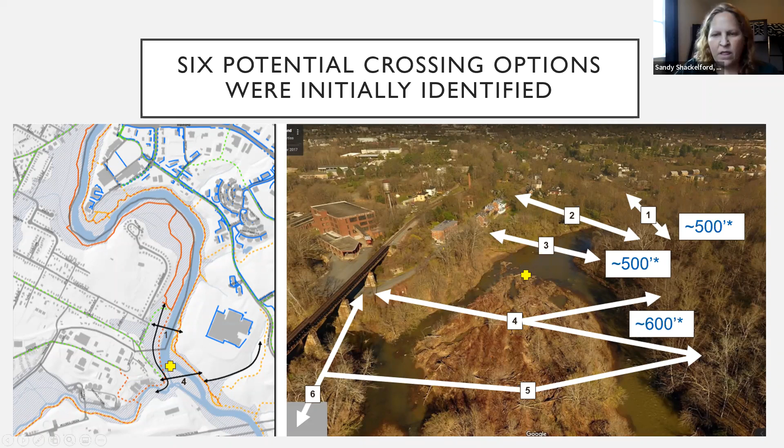Out of the original 6 options, 2 remained, shown on this diagram as options 1 and 4. The 2 alignments that remained are the ones you can see here on the diagram in red. I know it might not show up too strongly. The top alignment is what we'll refer to as the Chesapeake Street alignment.

It spans from the State Farm property on the east side of the river to the end of Chesapeake Street on the west side, landing basically at Riverview Park. The lower alignment is referred to as the East Market Street alignment.

It also spans from the State Farm property—this isn't privately owned property, it's owned by Albemarle County—and it lands on the west side of the river near the end of East Market Street.

This is actually private property owned by the Wool Factory development site, but it does have a public use easement.

Because this is a transportation project, both alignments are required to have logical termini that provide access to the existing transportation network. That means on the east side of the river, a shared use path, shown as this white dashed line, will be required to be constructed from the bridge landing to the transportation network. The termini, or connection point, for that was determined to be Peter Jefferson Parkway and State Farm Boulevard.

On the west side of the river, the bridge landing would tie into the transportation network either through a direct connection at Chesapeake Street or through the public use easement at East Market Street.

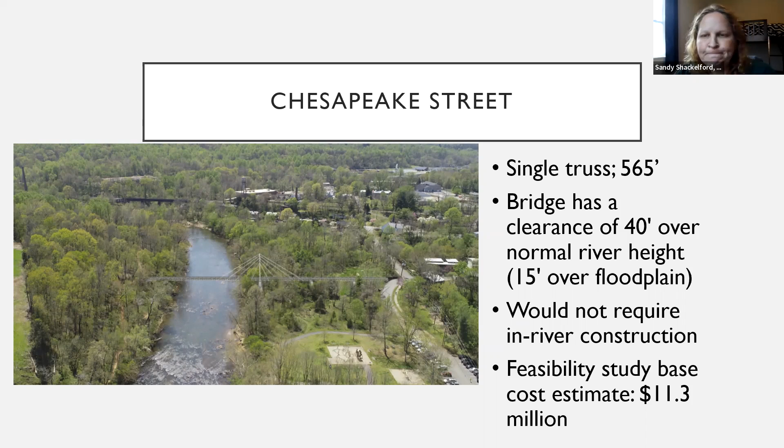Again, a different bridge design could be installed at this location, although the bridge design could also impact the cost estimate. The planning level cost estimate, although also likely to increase as the engineered plans are developed, is intended to provide an understanding of the cost differential between the two different bridge options.

In November of 2020, after this feasibility study was wrapped up, MPO staff facilitated a webinar that reviewed the feasibility study with the public and addressed many of the technical questions that had arisen as part of the feasibility study. The purpose of that webinar was to provide an opportunity for the public to ask questions about the feasibility study and share comments and thoughts, but the MPO did not have clear guidance on moving forward towards project implementation at that time. The feedback received from that webinar has informed the engagement process moving forward.

Any questions at this point before we move forward?

So I'm just going to talk about the engagement that we've been conducting to gather information that was used to basically inform the rest of the discussion that we're going to have today.

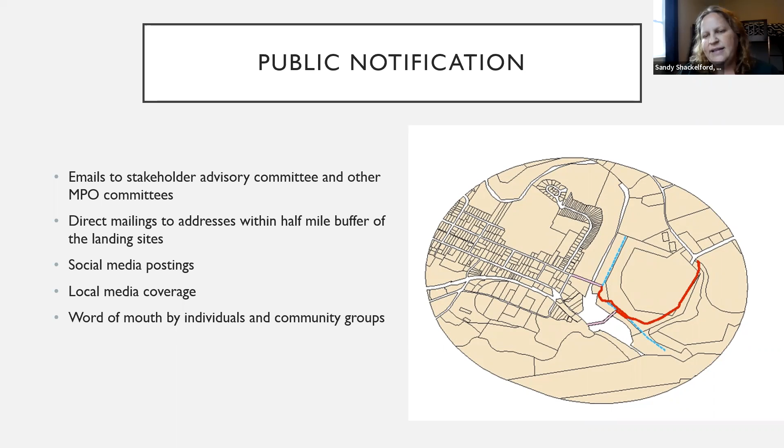We used a variety of methods to get the word out. We sent information to the MPO committees and stakeholder advisory committees to have them distribute the information through their networks. We also sent out a postcard mailing to all addresses within a half-mile buffer of any of the proposed bridge landings - you can see that on this diagram or map. We posted information on our social media platforms and provided information to local media and community organizations on request. All of these contacts help distribute the information and raise awareness.

So what did we talk about when we did all this engagement? This is a list of the factors that were part of the discussion. These factors were informed by the MPO's Citizens Transportation Advisory Committee, and then they were reviewed and refined based on feedback from the Stakeholder Advisory Committee.

So the first thing we can talk about this afternoon is how this bridge fits into the overall network connectivity for the area. There is a need overall for improved network connectivity, and everybody involved in this process knows that regardless of this bridge, there are still improvements that will need to be made to this network in the local area. But this bridge is not intended to solve all of the network connectivity concerns in the area near the proposed landing sites. It is intended to solve a very important network gap in the local area, which is getting across the river. The river currently acts as a barrier to movement.

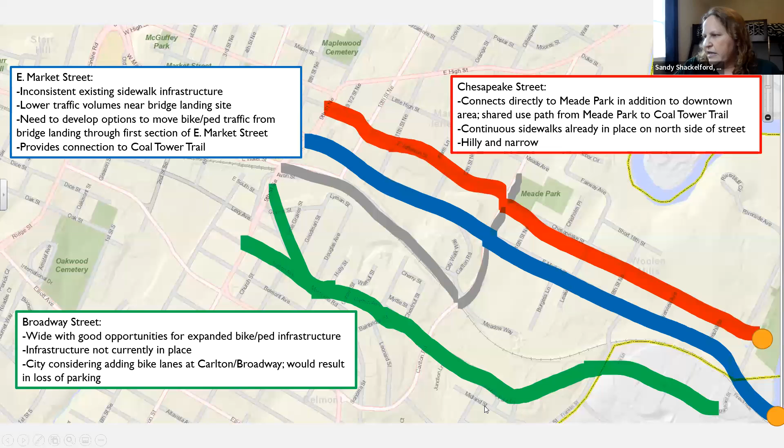There's also inconsistent sidewalk infrastructure along East Market Street going into downtown Charlottesville, but it also provides a connection to the Coal Tower Trail. The green line at the bottom shows the connection down Broadway Street. This would basically be facilitated by the connection at East Market Street through the public use easement that goes through the wool factory development site. However, it would involve traveling through the main parking area of the wool factory development, and there's no dedicated bicycle or pedestrian pathways through that development area. However, Broadway Street itself is wide, and there could be opportunities for future bicycle and pedestrian infrastructure to be constructed along Broadway Street. It's just not currently in existence.

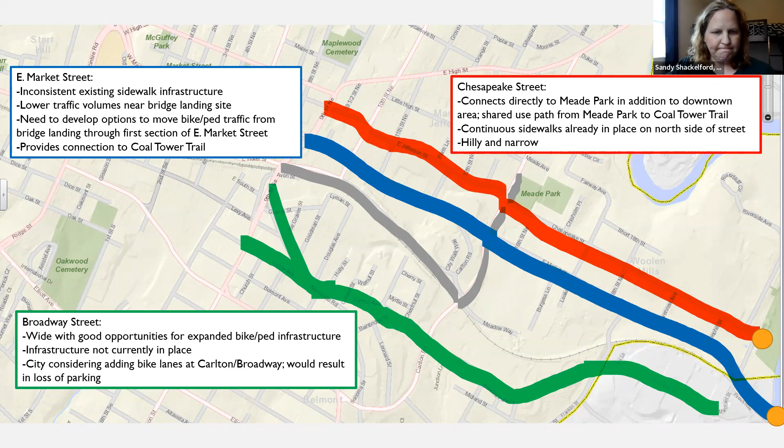The next thing we talked about was the trail connections. Also under consideration is how the bridge will facilitate connections between the two different trail systems. On the east side is the Old Mills Trail, and on the west side is the Rivanna Trail system.

Both alignments will provide a similar connection point to the Old Mills Trail on the east side of the river. The Chesapeake Street alignment would provide direct access to the Rivanna Trail at Riverview Park, up through here. Whereas the East Market Street alignment would provide a more direct access point to the Rivanna Trail system through the wool factory development site, right through here. Most of you are probably familiar that there's a footbridge at the wool factory development site that goes across Meadow Creek, so that would be the access point from East Market Street.

While either portion of the Rivanna Trail can be accessed from either of the bridge landing sites, there's a gap in the trail network of the Rivanna Trail between the sections at Riverview Park and Wool Factory that requires a short distance to be traveled on road.

As you heard in some of the comments, parking was a really big topic of discussion during the Stakeholder Advisory Committee meetings. This is due to an existing parking shortage at Riverview Park. This was a challenging conversation to navigate because it's outside the scope of this project to alleviate the existing parking demands, but understanding the concerns that there will continue to be incremental impacts if a bike and pedestrian bridge is placed at this location, we at least wanted to have conversations with city and county staff to determine what might be potential options to explore to increase parking facilities in the area.

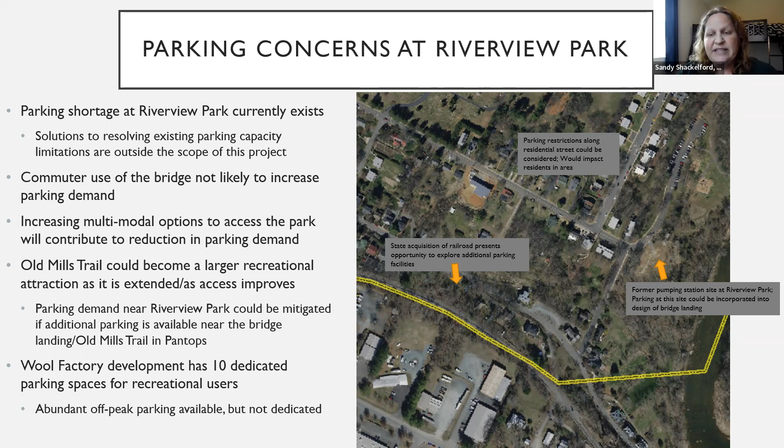At the East Market Street site, the Wool Factory development currently has 10 spaces dedicated for recreational use. Off-peak parking is abundant and it's currently made available for public use by the development. But at this point, additional spaces have not been dedicated for recreational use.

We talked a lot about ADA accessibility because this is a requirement for any transportation project. The requirement is that any new infrastructure intended for bicycle or pedestrian use maintains a grade of 5% or less, unless it's along a road that already has a grade in excess of 5%. When the feasibility study was developed, there was a portion of the shared use path that came from the East Market Street alignment that exceeded that 5% grade requirement.

It is possible to have that section of the shared use path rerouted to reduce the grade in order to comply. However, while the project itself can still meet the ADA requirement, it was noted during the discussion with the stakeholder advisory committee that traveling from the landing site near the end of East Market Street would require users to move up grades of more than 5% along the established transportation network in order to access the road network. We talked about how that East Market Street section that goes through the private property to the bridge landing site is really narrow and hilly. So the project would not necessarily be required to address the slope of that, and it could still present an accessibility challenge for people, even though the project itself would comply with the requirements to be ADA accessible.

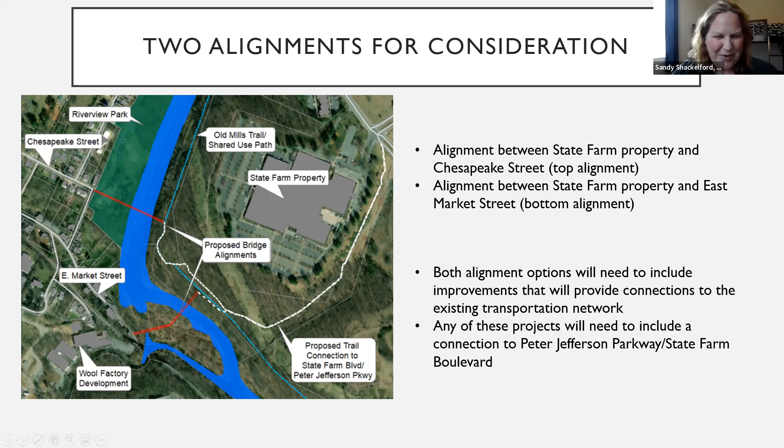I see, thank you. Yep, you're welcome. Yeah, Sandy, I think the steeper parts are maybe on Chesapeake, and I agree that lower East Market section is not quite so steep. It's narrow, but not steep. Okay, thank you.

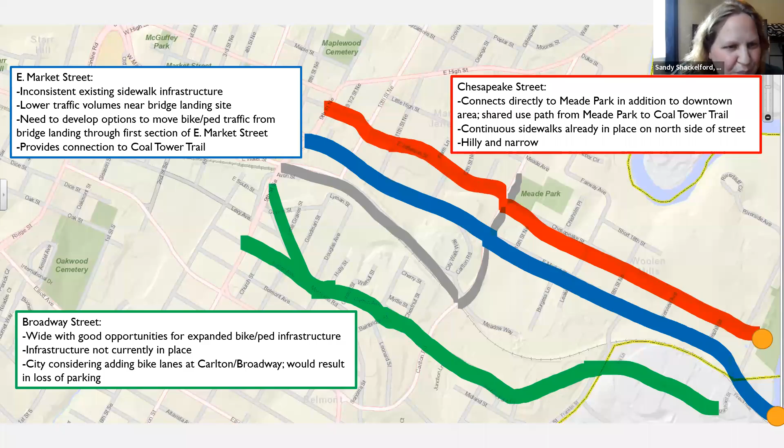Any other questions or comments?

However, the East Market Street alignment is at a lower elevation and has a lower clearance over the water than the Chesapeake Street alignment, giving it a higher risk of impacting the floodplain. As far as longer-term resiliency considerations, there's more risk with the East Market Street alignment due to the lower clearance, should flooding activity increase in the area. But there's still a lot of information we'd need in order to know whether or not that risk differential is significant.

The local area is currently served by CAT as far as transit access. On the Pantops side of the river, the closest stop is near Martha Jefferson Hospital. On the Woolen Mills side, there's an existing stop mid-block on Riverside, and another stop a little further up Chesapeake Street, mid-block.

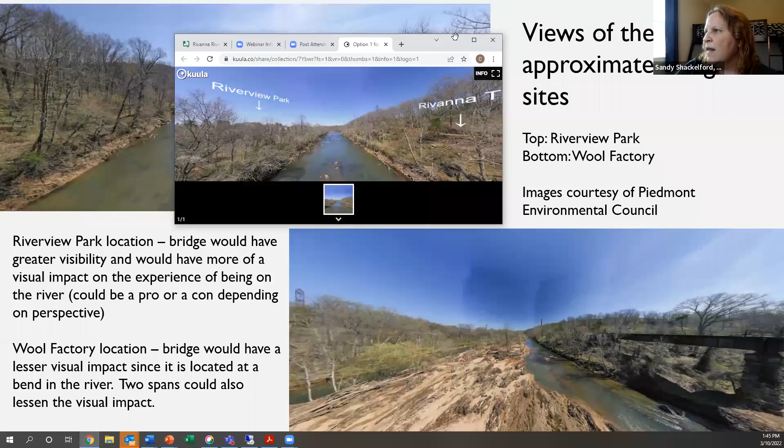So it's a nice open view of the river right there. And then this bottom one is at the East Market Street location. You can see you're overlooking the sediment island. There's the wool factory development. You have some other historical types of structures or assets in the background.

At the Chesapeake Street location, the bridge would have greater visibility from within the watershed, but it would also provide a greater opportunity for a larger portion of the public to be able to appreciate this view of the river that you can really only appreciate by being on the river at this point. So it does have a greater impact on the overall view shed, but it also provides an opportunity for a greater portion of the public to appreciate a view that is a little bit limited at this point.

On the other hand, the bridge at the East Market Street alignment would cross at a bend in the river, so it would not provide as significant a disruption to the view from the river. It would provide a greater overlook opportunity to what we refer to as a sediment island, and we discussed that a little bit in the Stakeholder Advisory Committee meeting as well. It's actually a very stable landmass and not really sediment, so sediment island is a little bit of a misnomer, but it is an interesting geographical artifact in the middle of the river.

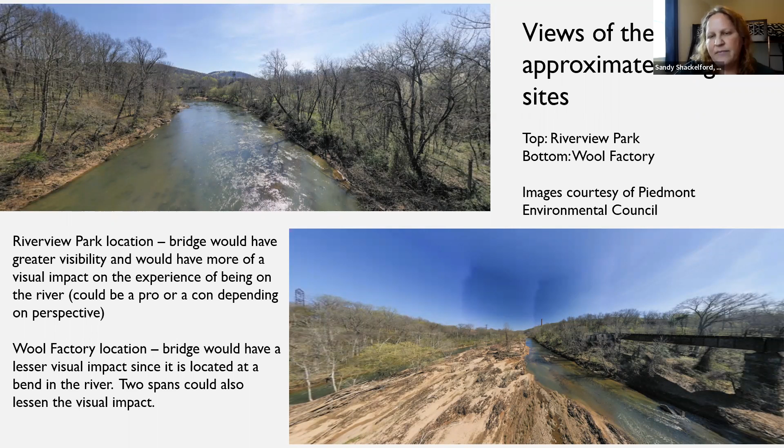We spoke a lot in the Stakeholder Advisory Committee meeting about how a bridge at either of these locations may impact local residents near either site. This is somewhat subjective and a matter of perspective, whether a bridge near a residential site is desirable or not. What one person sees as a positive impact, someone else may see as negative. If a bridge provides a resident with more direct access to a location of interest, they might see it as having a greater benefit, whereas a neighbor may see the same bridge as attracting additional disruption due to increased activity and changes in the natural environment.

The concerns that were raised through our stakeholder advisory committee discussions are shown here. There were concerns about parking, as we already discussed, and about additional vehicular traffic through the residential areas, especially along that really narrow part of East Market Street going into the Wool Factory development site. There was also a desire and expectation that Riverview Park will be maintained as a natural area, and concerns about the visual impact a bridge at the park would have on the local area.

I want to take a second to make sure we're maintaining the scope of the project, because it's outside the scope of this project to address any of the existing concerns. What we're trying to consider is the incremental impact of this bridge on some of these pre-existing concerns, and to the extent it's appropriate, there could be some mitigation measures implemented that could help reduce some of those negative impacts.

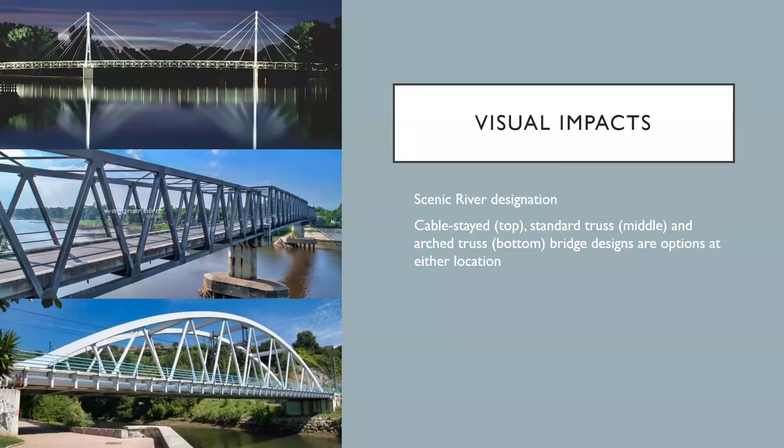So that's basically it for the Chesapeake Bridge. The East Market Street Bridge starts out at 320 feet and rises to 325 feet at the center pier in the middle of the river and the island, so at that point it's above the floodplain. Then it travels flat from there across to the eastern shore embankment and ties in at 325 feet.

Does that answer your question? Yeah, I think so. I guess I'm just curious.

The city just wound up agonizing over floodplain levels in that area relative to a construction project a little further west up Nassau Street. One of the things we learned was that there are a lot of very knowledgeable people who have serious concerns about whether the floodplain data for that area is correct. There are a couple of studies going on right now that we expect to have results on by the end of this calendar year, which ought to tell us with greater certainty what the real floodplain level along there is. Right now the level on Moores Creek just west of the Rivanna is at 324, and it goes up to about 326.4 probably half a mile or so up Moores Creek. The surface level of the river at that point, my recollection, is about 295. So I'm just trying to figure out how those numbers fit in with the designs y'all are talking about.

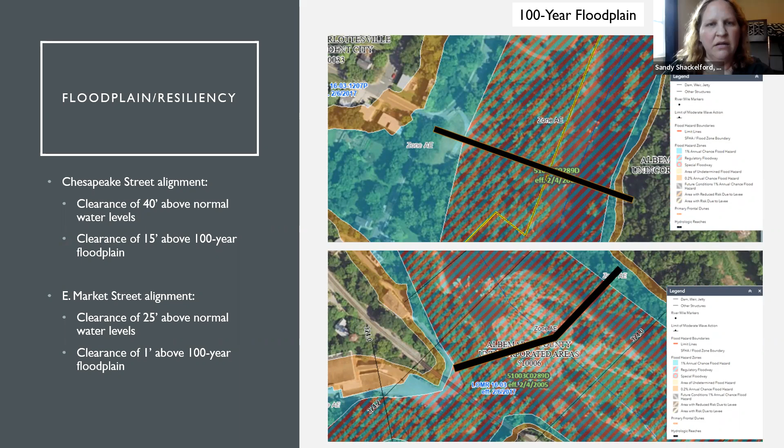We could look at it and see. I think in the estimates VHB did, they had about $6,000 a linear foot for the cable stay and arch suspension bridge, and about $1,500 a linear foot for the truss bridge. So you're talking about a factor of 4 for the cable stay and arch suspension bridge versus the truss bridge.

I just wonder if there's a way for lay folk like us, obviously at this level of design this is all schematic, conceptual discussion. If there's simply a way to say, comparing apples to apples in terms of bridge design, like Mayor Snook said, and I'm not prejudicing us one way or the other, but if we could at least get some sort of standard that's equivalent, I think that might illuminate the costs.

Because to his point, my personal preference is the Chesapeake alignment because I think most people in the public want it, but there's a lot to be said for the East Market Street alignment as well. But if we're going with a bridge design there that's inherently more expensive per linear foot, that might change things.